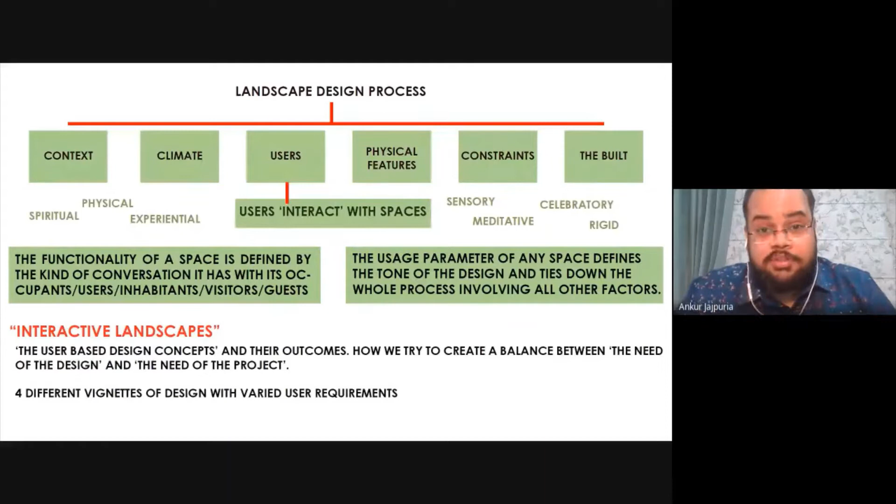We're going to talk about 4 different vignettes, or 4 different snapshots of projects being used by different kinds of visitors and users. If I speak about the first 2, they are kind of very special, they have a very different usage. The third and the fourth are more on the side of hospitality and a public project.

Moving on to the first project, this was as a freelance designer. This was my first project, and to be thankful, it was a very unique one. I haven't heard about this format ever in my life, and this was a very interesting project for me. This was an international garden and flower show which was organized in Japan, in southern Japan near Nagasaki.

The 2015 theme, they had organized a competition. It was the residential garden module. So the overall format was you had to design a garden relating to your own home country. That was the biggest challenge. Then the second challenge was the size of the garden. It was a backyard residential garden, and the size was 5 meters by 5 meters, that is 25 square meters.

Talking about some of the facts for the garden competition, it was a competition entry. They had a very strict construction window, they had to construct within 3 weeks, and I could not visit the site before that. The competition was in a format where the user would be visiting your garden, and the organizer would have 15 minutes to sell the design. So you have overall 15 minutes to impress the client.

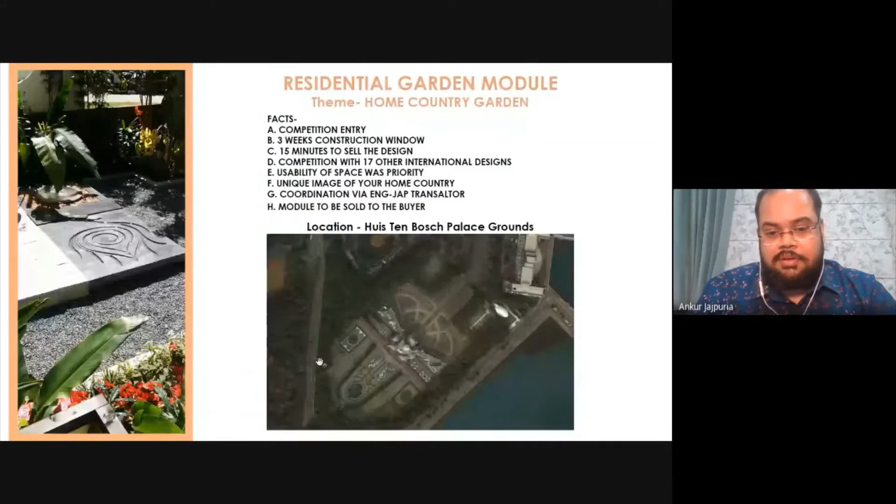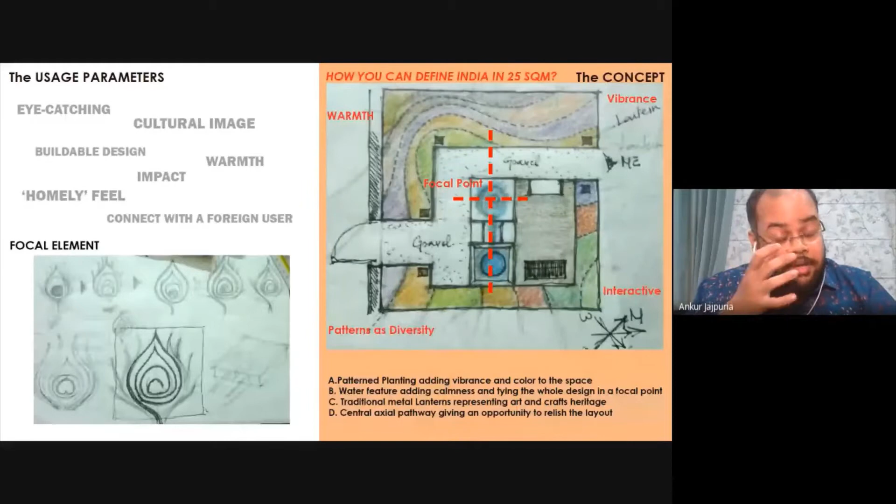When we started the design process, we had no clue. We didn't know what kind of people visited the place. But something we went ahead with was a set of words that we wanted to keep in mind, where it had to be eye catching, it had to create that impact once you see that thing. For selling it, you had 15 minutes, but I guess to enter the garden you need just a second.

So that second, how you create that second interesting, that would have played a very important role. And then again, it was a residential garden, so the comfort and feeling that you want to create. We also remembered that we are creating not for Indians, not for our home country, but for people who will be visiting from different countries. So we thought, the first question that came to our mind was, how can we define our country, India, in 25 square meters? That was the major question.

We went through different options and different ideas. The main concept we thought was, let's narrow down to a couple of words which will define the whole theme of the garden. If you see this concept sketch, what we started off was the simple space. We didn't want much of a complicated design, we wanted something to play with the elements. We wanted the pattern planting to show the warmth, to display the warmth of our Indian culture. The vibrance of our Indian culture is very colorful, very vibrant, so the planting should reflect that.

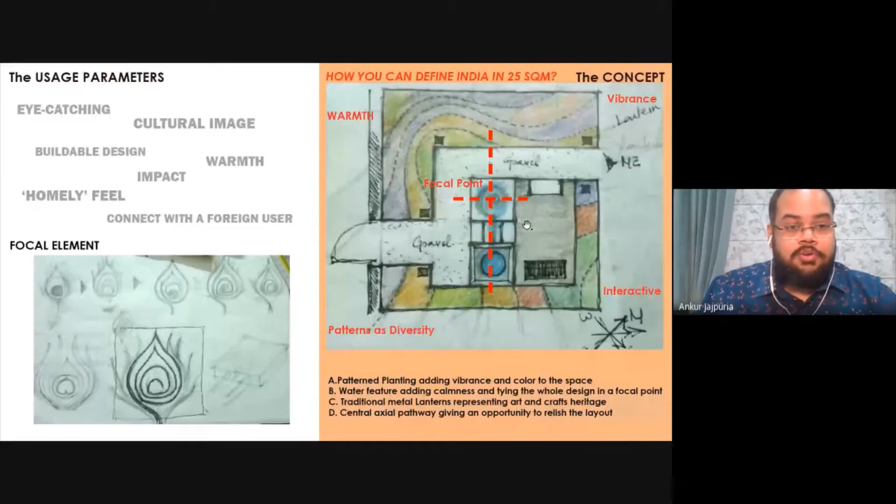We had a question: how do you attract the visitor? We needed one focal point in the middle, and that could be a water feature, because people relate better to a water feature. So we thought about what image this focal element could have. Since we were representing India, I thought, why not use a peacock feather and convert it into a water feature, which ties down the whole design and gives you a central point to look into. Moving on to the actual plan we made.

We imagined this was a house, and this was the entry from the house, and this was the entry from outside, sort of the backyard entry. Then there's a pathway which gives you a chance to interact with the space, to see around. You can see the layered and colorful planting, which mimics the warmth and vibrance of Indian culture. You can see this central water feature designed through a peacock feather, and this plaza where you can sit on the ground and enjoy the space.

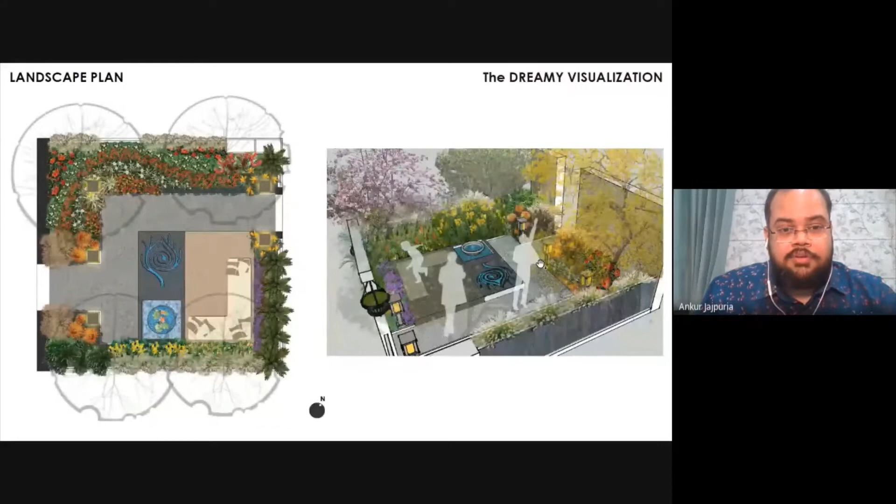Some visuals that we created show how this would look in 3D. It was a very tight space, 5 meters by 5 meters, and we wanted to do a lot of things. But if you look at the total scale, I think we managed some breathing space for the visitors. We also oriented and selected a spot in the plaza, the garden palace, so that it was facing the northeast side, which was the Indian auspicious direction.

Talking about the most important part, the planting - we were given a set of plants available in Japan, around 800 to 1,000 plants. They gave us the list, and out of that we selected things which were common to India and which were growing at that time of year. We're talking about October, so it's kind of a retreating summer for them. Most of the plants were common to Indian species.

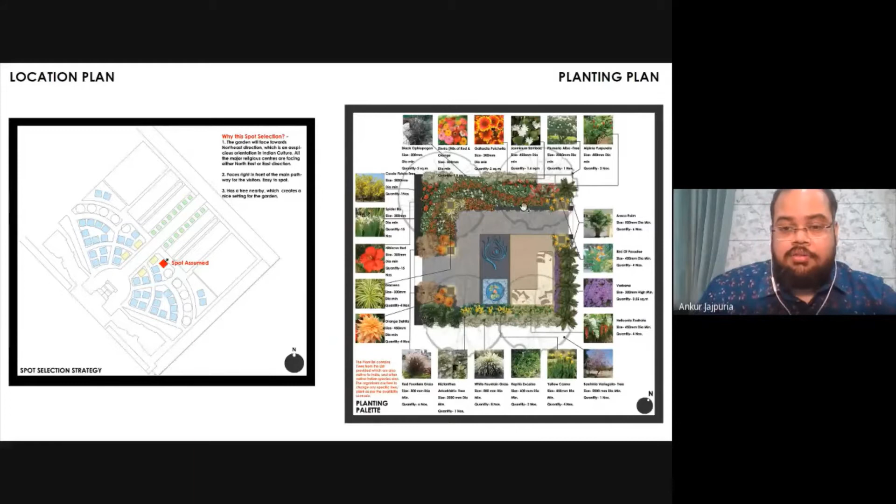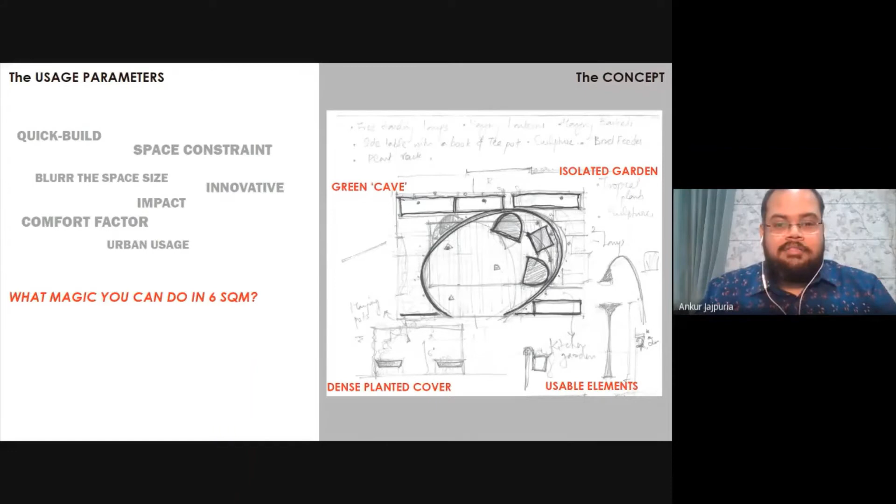So you can see how we framed the whole plan, giving a very tight space, surrounded by planting. Whenever you look around, you have these colorful, lush, patterned plants around. We gave them a chance to inhabit the place, to show how you can use that space—put a small coffee table, a reading lamp, and when you look out of the window, what you see is actually framed by planting.

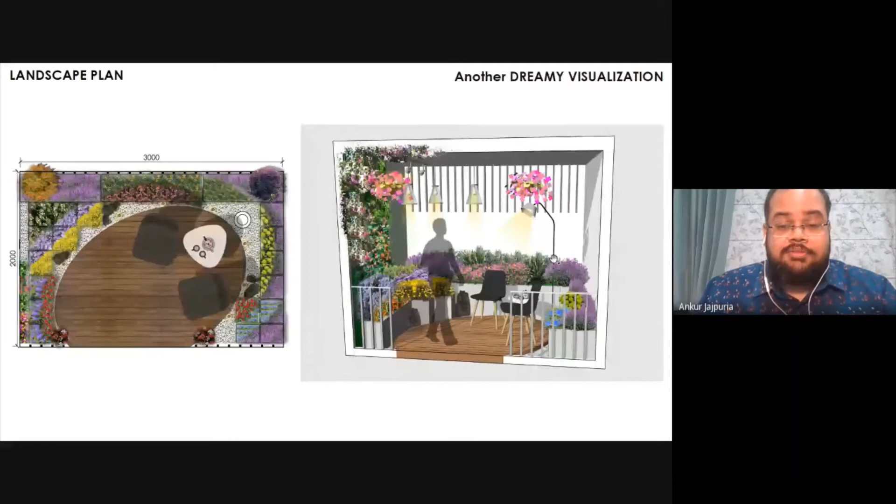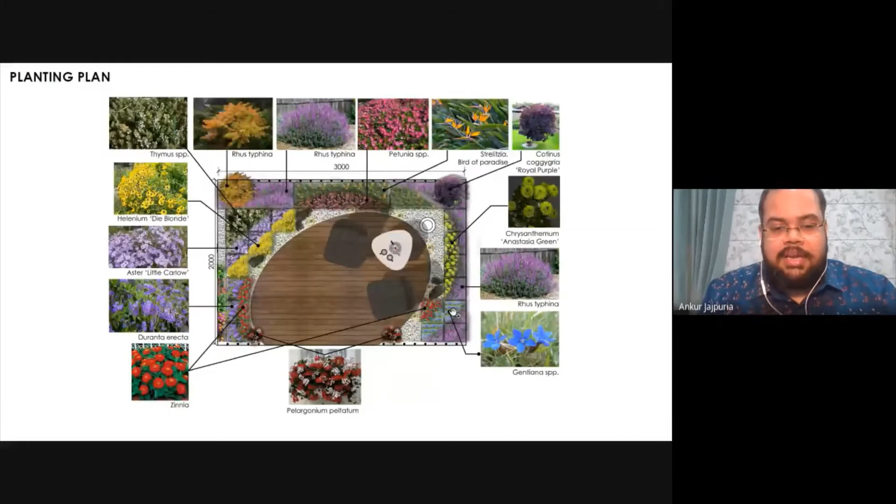Again, the plant list was provided to us, and this time we couldn't find many plants of the Indian family, but we focused on the color palette. Thankfully we coordinated with the site people and formalized a planting palette. If you see the images, they sort of made a frame of the whole place, and then you see how it was actually built.

We realized it's a very tight space. You can see the chair and the table, but I think the setting we wanted was working—you can see how this colorful green wall creeps up and activates the whole corner. If you see the backdrop, it's more secluded, and then the plants take over in some time.

And at night time you can use it as a space to read a book or have evening tea, and how these plants also liven up the whole feel.

So the third project I'm going to explain is about a jungle retreat. It's a hospitality project in Tehla, near Jaipur, about 100 kilometers from here. I'd like to thank Anodya Architects, architect Keerti Singh and architect Manish Mewara, for giving us the opportunity to associate with them on this project.

Talking about the whole context of the place, it's near Sariska National Park, actually right outside its boundary. So obviously the project would like to have a wild touch, a very native biodiversity feel. We had a very challenging topographical site—rocky features, undulations, lots of mounds up and down.

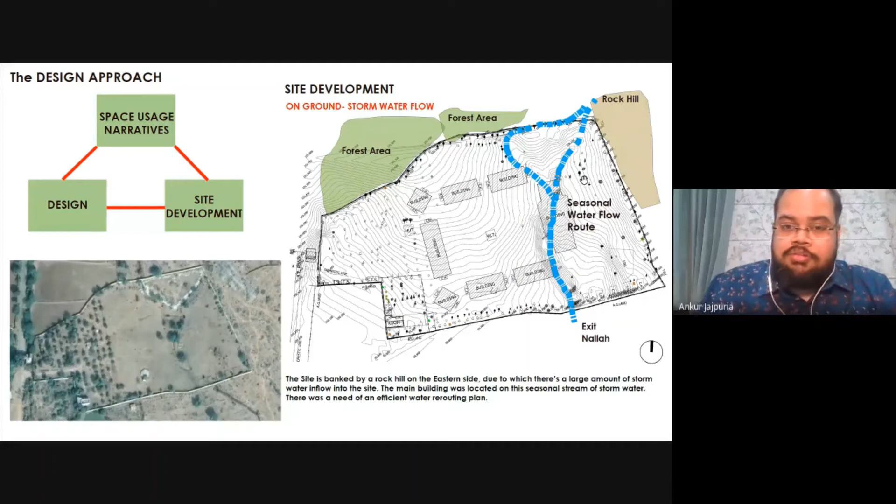When we started, these are the existing pictures we had. You can see the site already had that wild touch, and it already had enclosures which form the kind of spaces we were looking for.

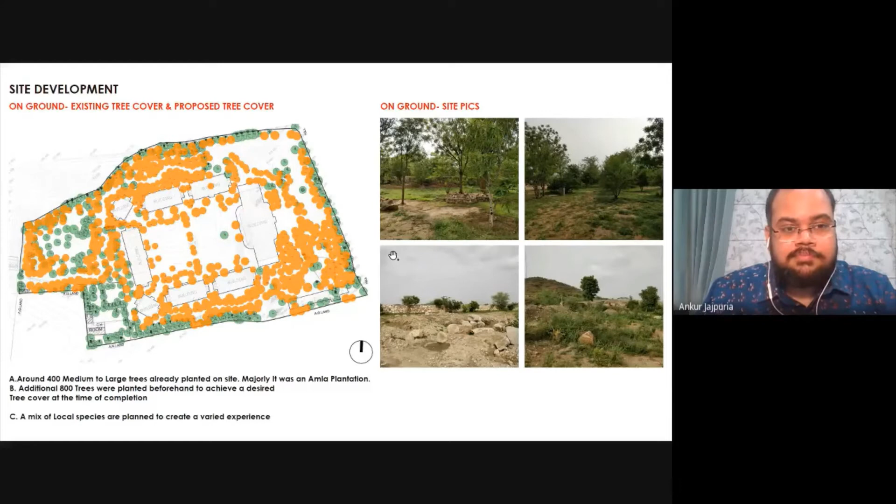We started with the first major site development, which was rerouting the whole stormwater flow because we didn't want the water to bother us. We sorted out the old water flow path and divided the whole flow into 3 reservoirs.

We broke down the stormwater flow, and when the water was coming, we tested it out before actually opening the property, in the first monsoon.

The water was coming onto the site from 2 different points. So we broke off the boundary, brought the water in, and made percolation and recharge pit chambers in different positions, so the water that comes doesn't go to waste - we can use it for recharge.

We can increase the water table for the site. This particular water feature, water reservoir 2, we imagined to be more of a visual ambient feature. We made it non-percolating so it could create that ambience, that wild pond look for us.

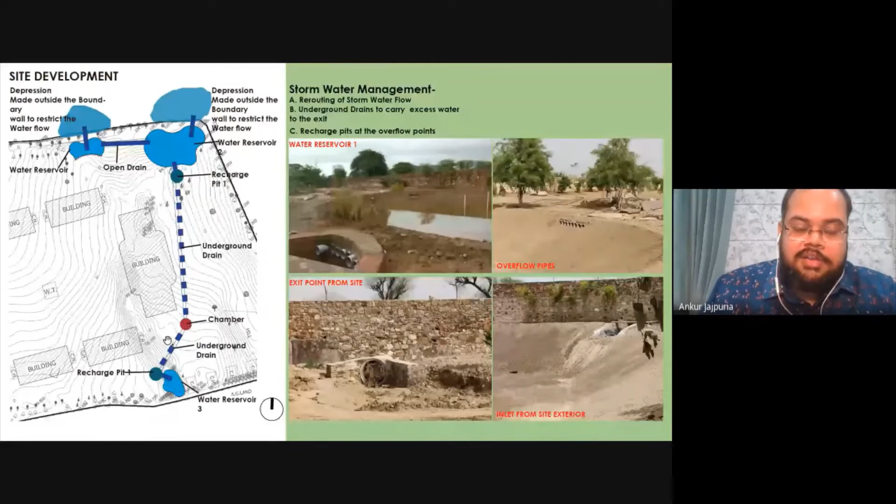You can see the non-percolating water reservoir, with inlet points and an outlet point which feed these recharge basins. This is the picture of the recharge basin. Whenever it fills up, the water goes to the recharge basin and subsequently to the next one before finally going out of the site.

Once we figured this out, simultaneously we were doing our design process, imagining this project. It's already surrounded by Sariska, sort of surrounded by wildlife, so we thought, why not give the users a journey to remember.

When they come inside, they can park their vehicles, and an electrical vehicle can take them through the wild plantation to arrive at the central building. The overall concept was that the main building blocks were arranged to enclose a formal garden between them, while the outside becomes more informal.

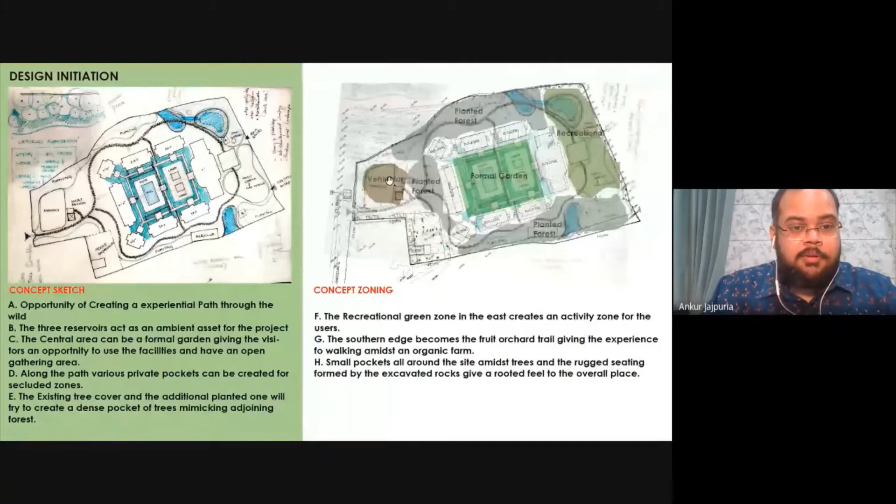You pick up your luggage on a cart and drive around between the trees, giving a feel of the whole wildlife experience. Then going through a twisting, winding pathway, you arrive at the arrival plaza, which is the reception. Even the buildings were placed and designed to encourage this pathway pattern.

If you see the overall layout, the eastern lawn and garden form a very recreational outdoor activity area, giving us the major pond, where you can have various activities along the pond and various games in the lawn.

You can have a small play area for the kids, and the southern pathway becomes more of a densely planted orchard walk, with fruit trees planted at this edge, so you can have organic fruits in this area.

So in terms of the visitor experience, we're talking about various different experiences. Right now the project is open, and they have different kinds of spaces along these small pockets - all kinds of very small secret gardens.

You have hammocks lying in them, and rock seating between them, which makes for a very natural touch.

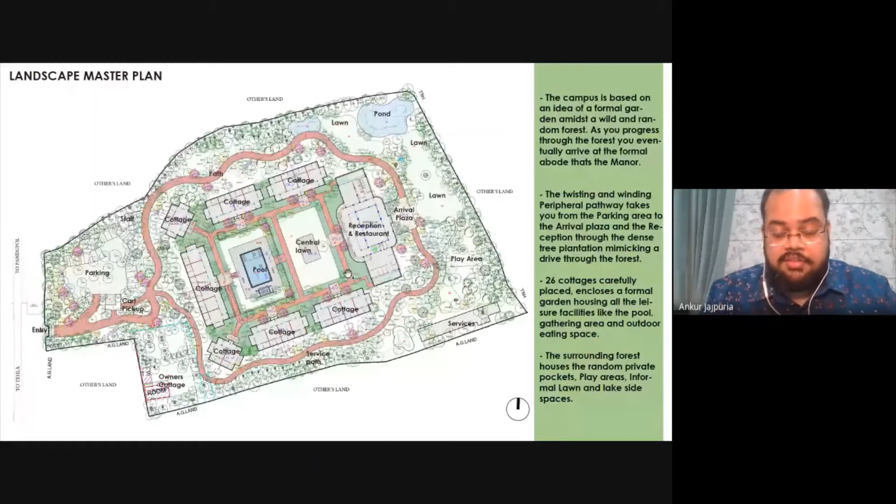Coming out to the central garden, the central area was more formal. It contained the pathway taken to your cottage, and we needed some kind of activities for the guests. So we placed a pool in the center, giving an all-round view of the cottages, and this central lawn is used for different performances, breakfasts, winter lunches, etc.

Talking about the eastern part, this is the most interactive, habitable, active zone. You can see some details happening for the pond, which we made in a very sequential manner, excavating it, putting a liner, lining it with bricks.

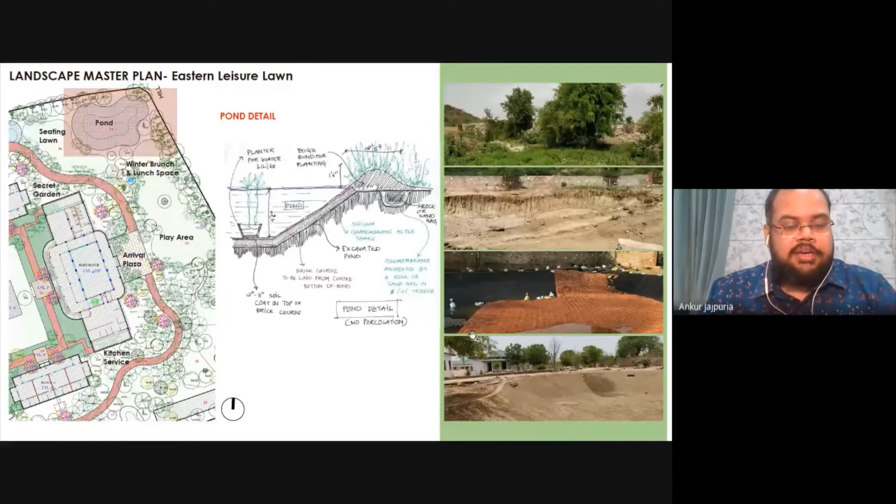And then giving it a soil cover to make it non-percolating. Some images of the pond show the current state, how it has shaped up, and how the planting on the edges is not very dense - it's very wild, like you'd find in the forest.

Then you come to this eastern lawn, which becomes the main active space. These rocks were actually excavated from the site - when the buildings were being made, they were retrieved from the ground. So we used them in the landscape as random seating.

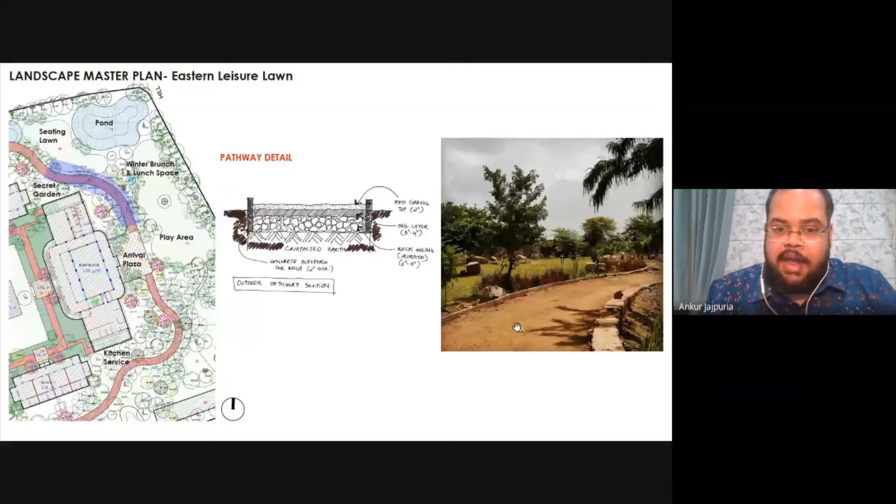In terms of material, we wanted the project to have a very natural feel, so we tried to use minimal stone and minimal concrete. Even these winding paths we made in gravel and rammed dirt. We made local stone retaining walls, edged up with stone putties on the edges.

So this is the final look, the final look of the pathway - we're not going to top it up with anything. You're now looking at a very natural path, and you can see the winding and twisting effect it has on the whole project.

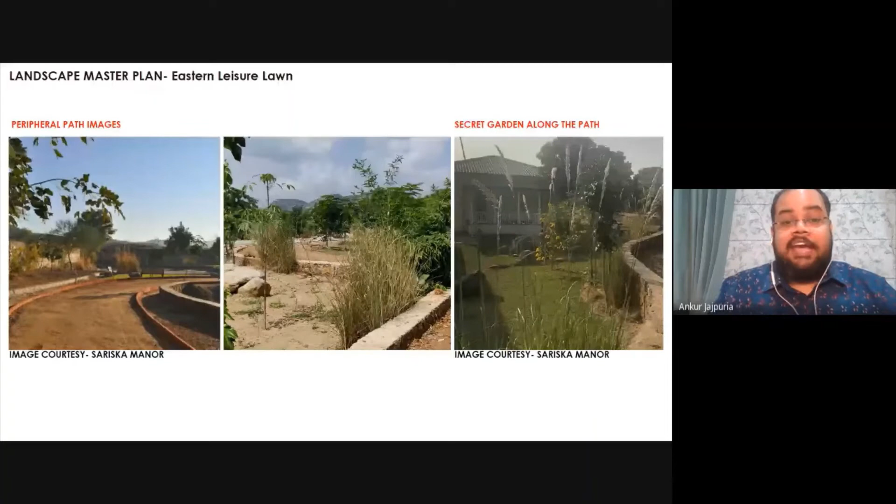There are small secret garden lawn pockets happening along the pathway. If you see the whole project, all these pockets are for visitors to freely roam around - they are encouraged to spend time outdoors, and that is what we eventually want from a project.

Moving to the more formal part of the project, this is the central lawn with the raised pool, which overlooks the main block. This is the main block, so now we're sitting here facing this way.

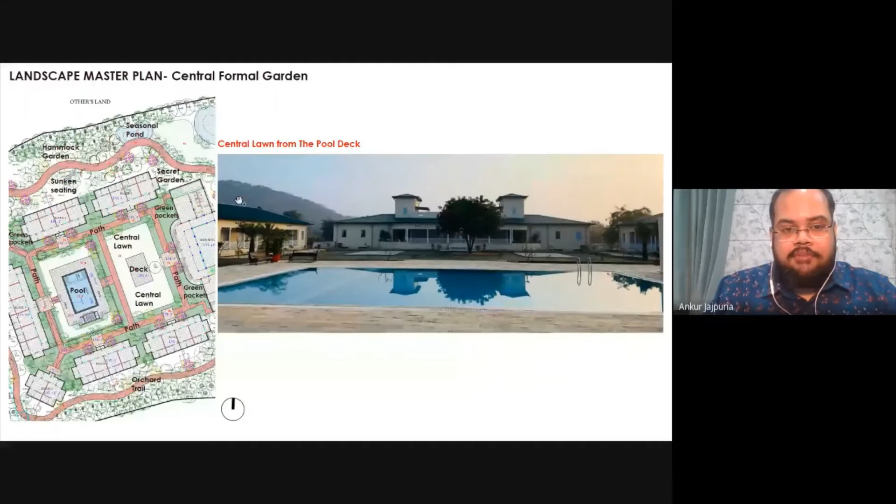You can see the pool deck - it's more open, more interactive, with a very nice view of the northeastern hills from the pool. When you come out from the main block, you arrive at this plaza, and this is the central lawn, divided into two platforms used for various performance areas.

In terms of activity, this central lawn is also used extensively in winter. The hotel lays out its tables for various activities, and even at night they can use it for bonfires. Now, talking about smaller details and elements we tried to use in the project.

We didn't want to use plastered walls and RCC walls, so we got local stone and made all these retaining walls with exposed stone masonry - you find excellent craftsmen for that in the Sariska nearby areas.

The rocks which were excavated from the site were used for signages. This is the Sariska Manor, the main signage of the property. The signages are also used in front of the cottages, which are each named with different tree types, so these rocks are used for that.

Even this particular project is very important in terms of the involvement of the client. The client was very excited and very involved with the project, and they also started giving suggestions, which were very important.

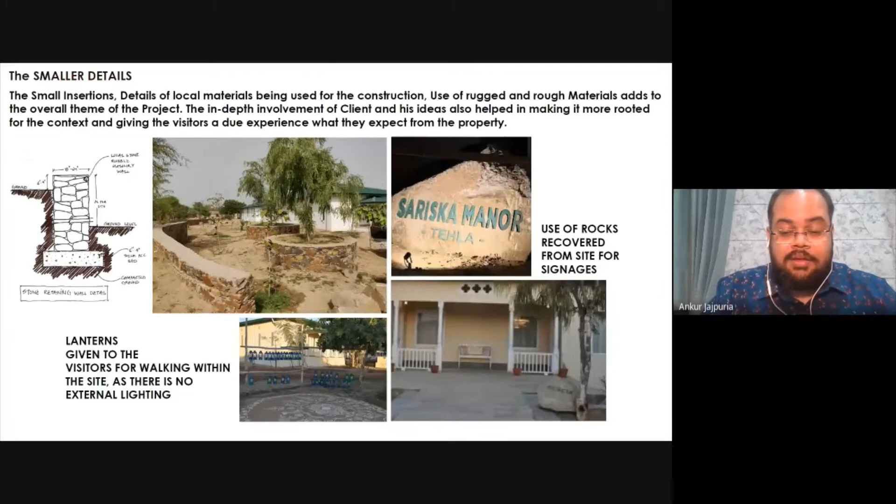Now moving on to the fourth project - compared to the rest, this is a very extensively used project. The main USP of this project is that we are imagining a humongous amount of people will be visiting this place. This is the Sri Rani Bhattiani Temple Complex.

It's in Jasol, almost 2 hours drive from Barmer. The client is the temple trust, the Sri Rani Bhattiani Mandir Sansthan. I would again like to thank Anodya Architects for giving us this opportunity. The total site area is 11 acres, combining the temple complex, the planned residential complex, and the parking area. It has been going on since 2015, and we are looking to inaugurate sometime next year.

Talking about some history of the temple - Jasol Mataji temple is a very ancient temple with a huge fan following in Western Rajasthan. Mostly the traditional village community has this following, and they have 5-6 fairs throughout the year. We imagine the footfall escalates from 10,000 to almost 2 lakhs per day.

Talking about the context of this project, it's based in Western Rajasthan. We are looking at high temperature variation, very scanty rainfall, occasional dust storms, and very bad soil quality.

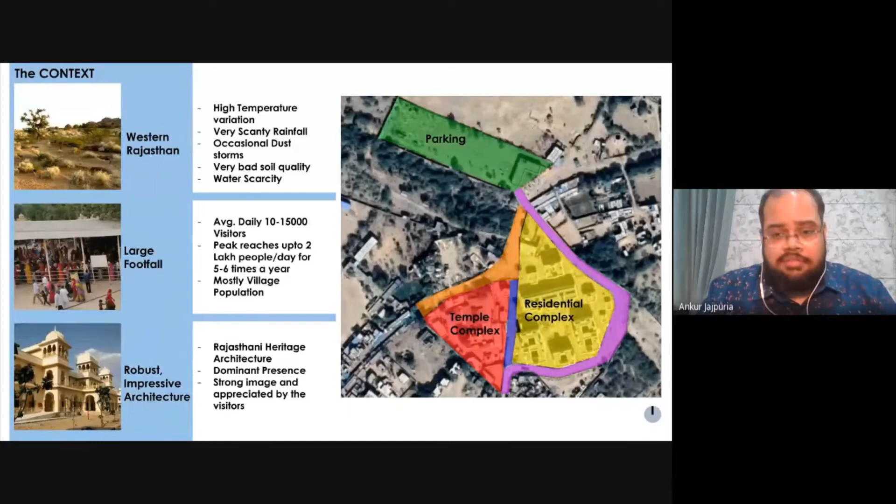If you look at the whole campus, on the left-hand side we have the temple complex - that's one part. We have the residential new campus - earlier we only had the temple campus, and now we've developed another campus for residential use. If you see the back, we have the parking area, shown in green.

Talking about the main circulation happening right now, shown with the blue line - people come from the village and town on the southern side, drive through the blue line, and park their vehicle in this Maidan, which we're now designing into a parking area. Then, following the red line which is the current usage, they park, wash their hands, keep their shoes and chappals, and enter the temple complex. This small stretch of road becomes very jam-packed - it's the main artery, and during melas it gets extremely congested.

The green line represents the intended circulation - the new entry that we are planning now.

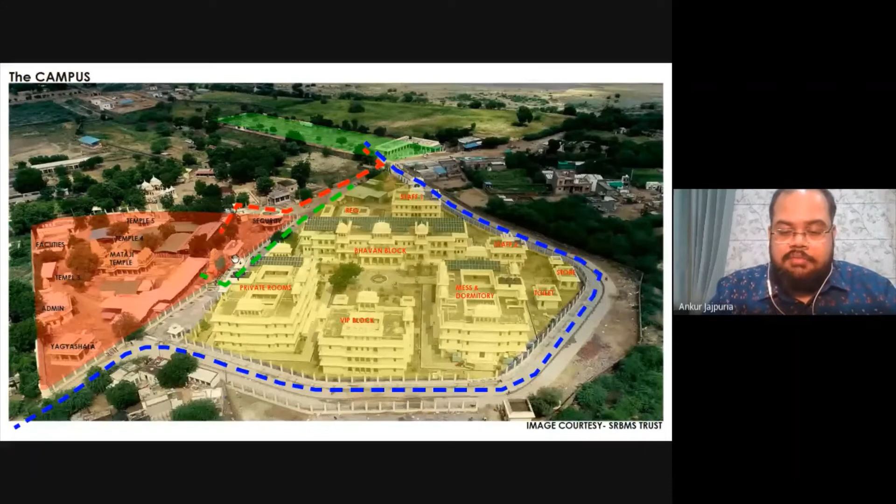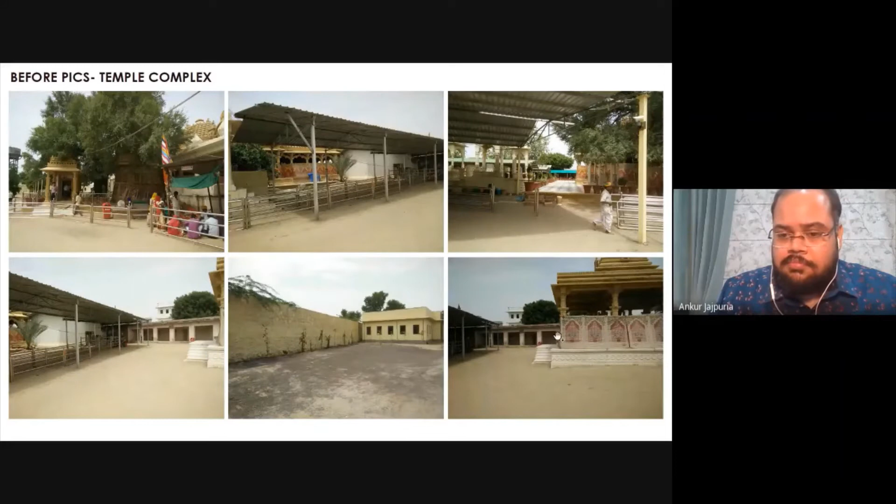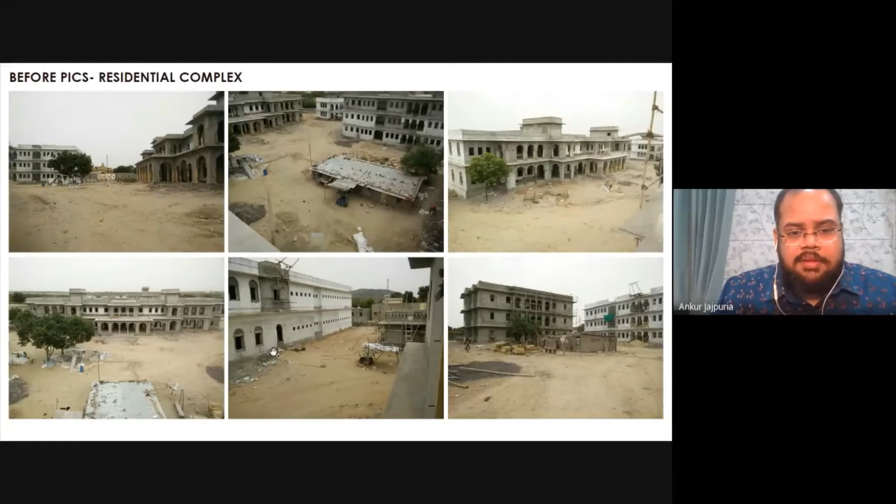So again, talking about this, we sat down and listed how we wanted this campus to be. At one point we talked about a very green campus, landscape design elements, lush green plantation, water features, many things. But then the main thing that was going to affect everything was the large footfall of the project.

There are many things associated with this amount of people. The movement is a constraint, the gathering spaces we need to provide for congregation facilities, the hygiene facilities, the toilets and water drinking points that need to happen. Visitors come to offer prasad, and that's a big thing, because with this number of people, the amount of prasad and items collected is also huge.

And then you have a very important thing, the connection with the goddess herself. You don't want to design something which disconnects you from your goddess. So we thought about that, listed these design principles, and then moved on to a master plan.

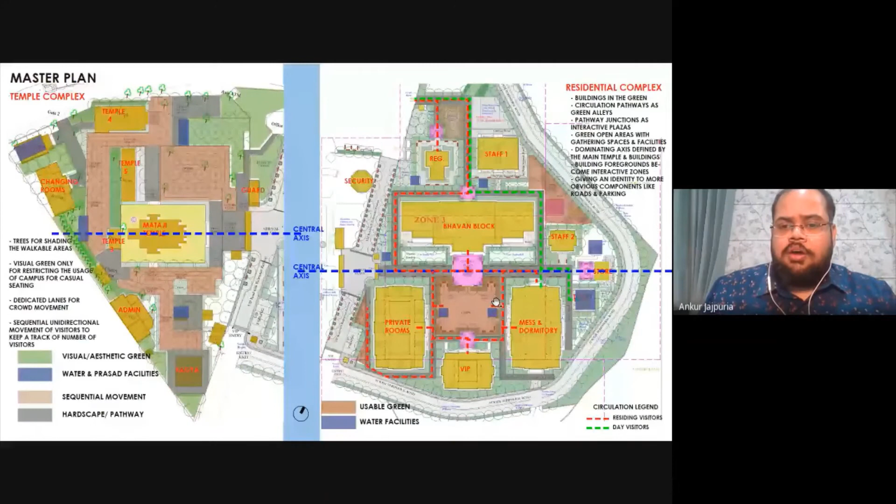These pathways are big, 6-meter wide pathways, that take you from the entrance, where you have your registration and are allotted rooms in these complexes, and then you access all these things. If you look at the whole area, the central area becomes the most used area.

You have the mess and the dormitory block. People residing here will visit that place, and people visiting the temple also visit this place to have meals. What they do after having a meal, and at different times of the day, depends on how this area behaves. So we designed this area with one big lawn for the Jagratas and Jagrans that happen.

The main avenue, a 6-meter road, also acts like a seating space, because we're talking about a large number of people, so you can't designate specific spots and tell each person exactly where to sit.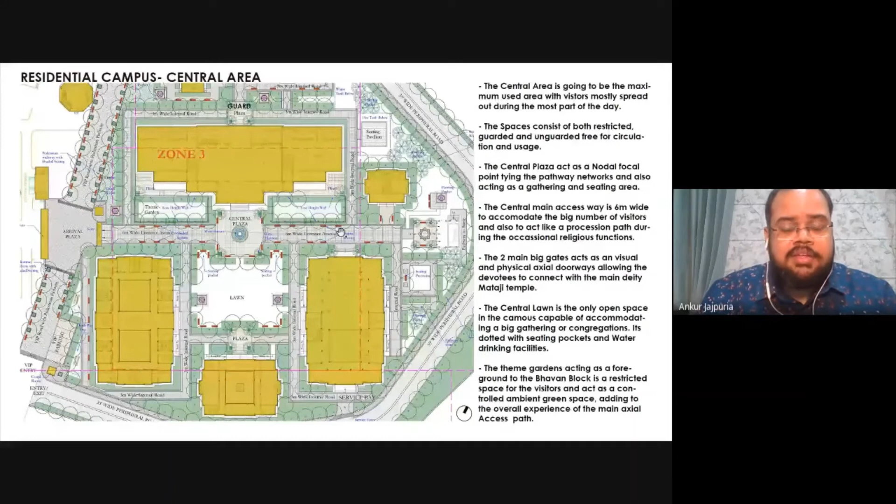So the space had to act in itself, functioning as seating and enclosure spaces. Talking about the main central plaza, all the plazas along the pathway become very activated spaces. If you look at the scale of the central area, you can see the new campus has a very large area, eventually used by a lot of people.

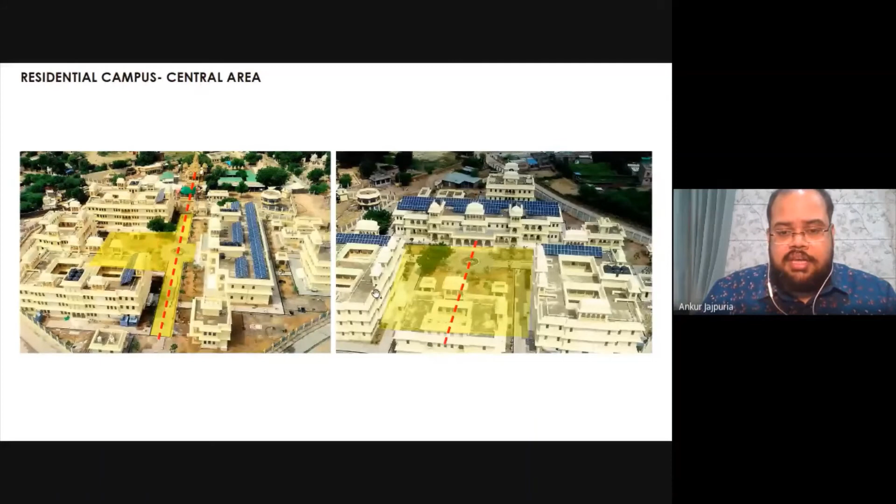Seeing some pictures of the campus, this is the central main 6 meter avenue. This is the main Sangh Hall, the Sangh Bhavan building, facing the central plaza. You can see this connection to the Mataji temple, which we have maintained. This access becomes very important. This is the main central plaza with the water feature waiting to be installed. These are very recent pictures.

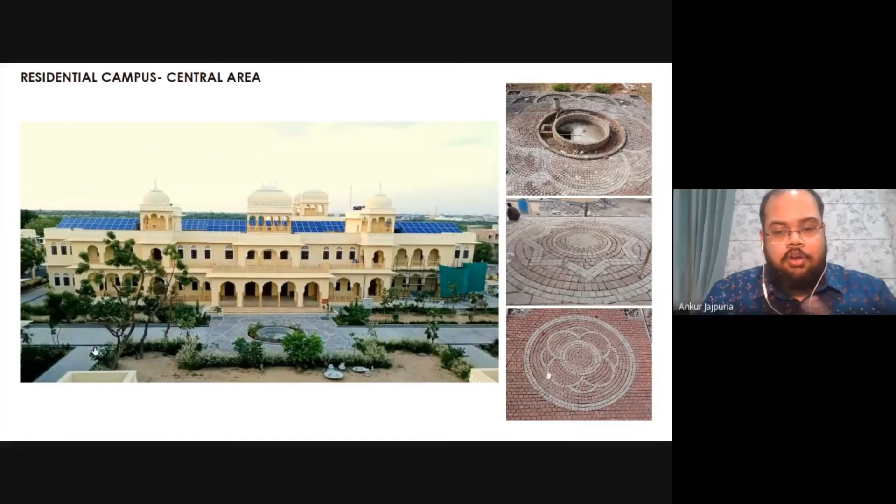We thought about how these plazas could be activated with flooring patterns, trying different things to break the monotonicity of very long and wide pathways. So this is the central plaza.

You can see how this central space has planting that goes along with the building facade. This is the main lawn we are looking at, still to be planted. It will be done this monsoon.

You can see how these facilities start happening, because along with the handling you also need water drinking facilities, designed to accommodate 6 people at one time, open from all sides so you don't have to wait for your turn of water.

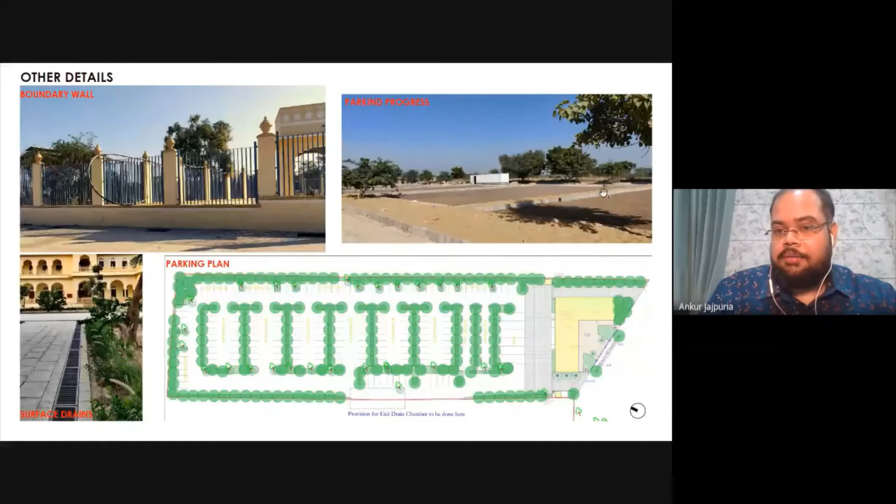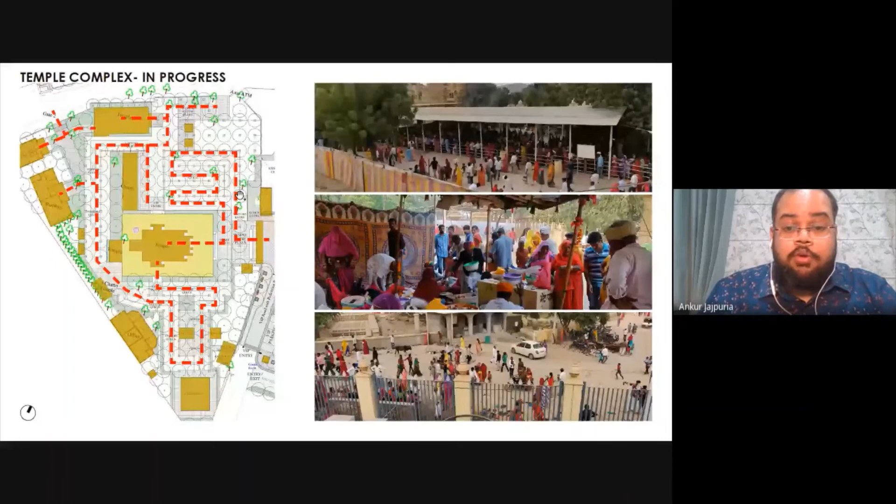So we are now trying to do a mock-up of the whole thing, because we don't know yet if the layout is going to work or not. So we are getting that done.

In the end, I want to say one thing as a landscape architect, as an architect, as a designer: during the design process, we try to interact with ourselves, and we literally speak to the design, establishing that need of a dialogue and conversation with the different components of a design. That conversation, that dialogue, that interaction is required for a good process. Thank you.